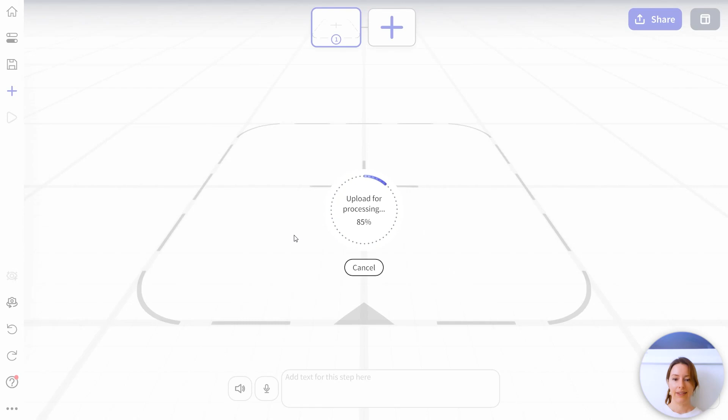Now we have two different options here. We can choose to bring in a 3D model from our CAD library, or we can load up our own 3D CAD files. You can see that's loaded into our scene.

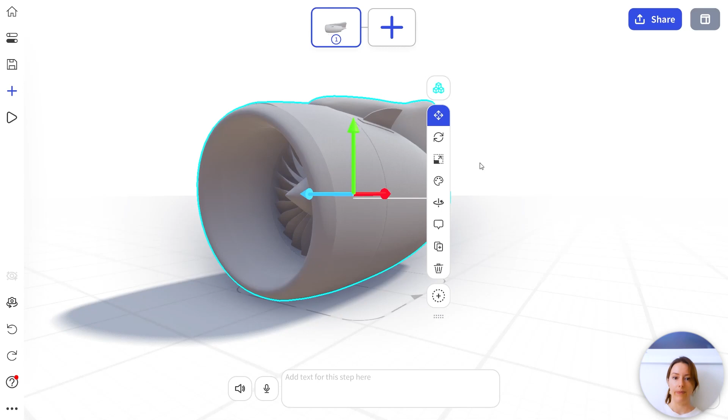Now we'll begin editing our model using the Jig toolbar. You can see that this contains a number of different tools that will allow us to edit our 3D model. We're going to start off with the Move tool. By dragging on these arrows, I'm able to move our model around our 3D scene. I can also open our Objects Properties panel in order to edit our position, rotation, and scale.

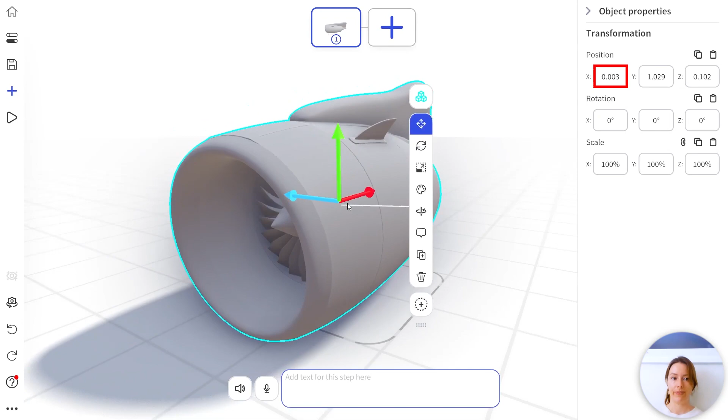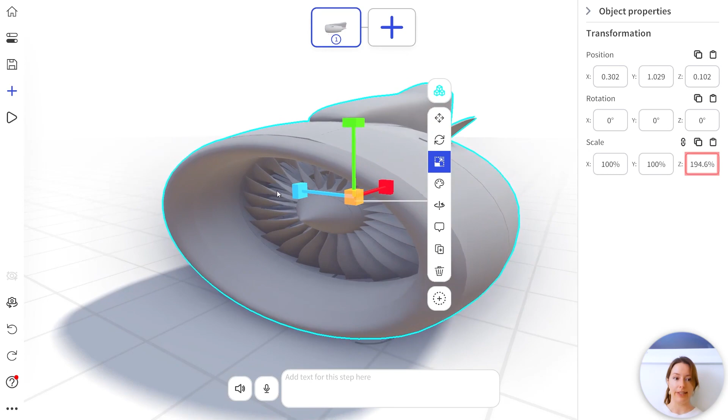Now if you watch the X-axis panel, you'll see that those position coordinates change as I move our object around our scene. I can also rotate my object and you'll notice those rotation values changing. I can also type in a custom value in our Z-axis box, and do the same with the scale. If I scale my object up, you'll see those values changing. I can also scale my object across the different axes. So the Object Properties panel is especially useful when doing precision movements, rotation and scale changes to your 3D model.

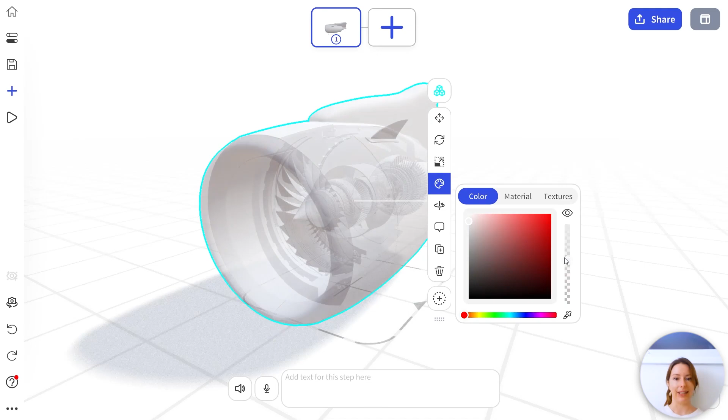You can see that I can edit our object's color. I can also apply some transparency or make it invisible using the Hide tool. We also have a number of different photorealistic materials to choose from. I'm just going to stick with the standard for now.

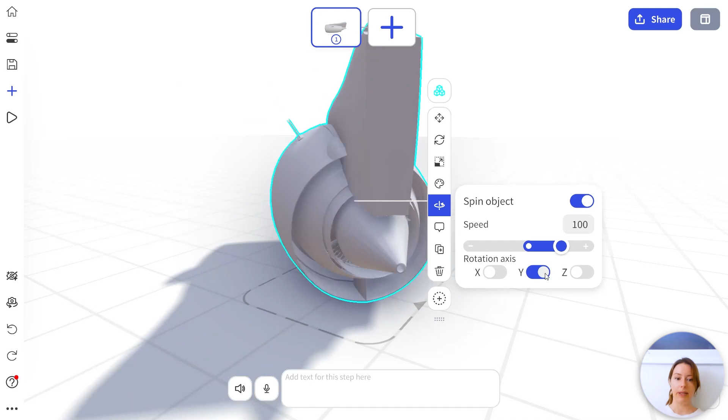Next, I'd like to show you the Spin tool. Once I turn this on, you'll see that our whole object is able to rotate. We're able to change the spin across different axes, but this tool is most powerful in sub-object mode. Here I can spin things like our turbine. I can also add in a custom value or drag this up to spin faster. And I can turn that spin off simply by turning off the toggle.

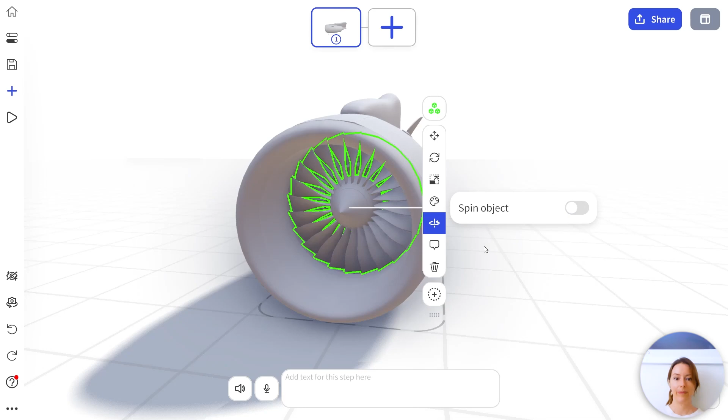Next, I'd like to add a label to our sub-object. In this case, I'll fill in turbine. Now if anyone clicks on this object, either in AR mode or in the web viewer, that label will automatically appear. I can also set this label to always visible. This means that the label will stay turned on and attached to our object at all times on this step.

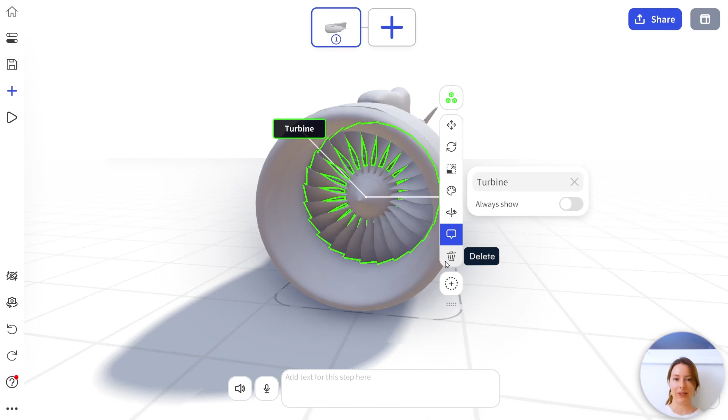Next, I'm going to show you the Delete tool. You can see that our turbine sub-object has now been deleted from our jig. And in order to bring that back, I just need to go to the Undo tool and our sub-object will automatically be loaded back into our scene.

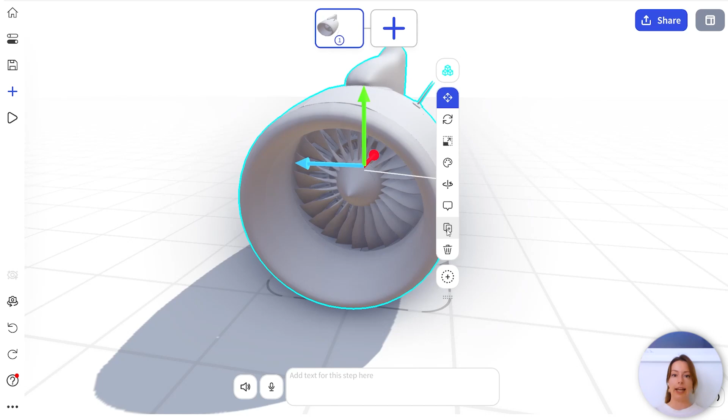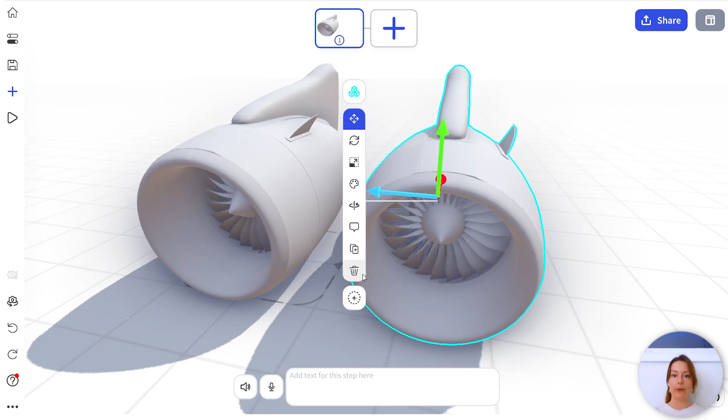Once you swap back into object mode, you'll also be able to access the Duplicate tool. This tool allows you to create an exact duplicate of the current object you have selected in your jig scene. This duplicate will also have the attributes that you've edited applied to it. So if you've changed or applied a material and color to your object, as well as given it some spin or labels, those will all be copied across to that new object as well. This can be a great way to quickly populate your scene with pre-edited objects.

One of the most powerful features of the Jig toolbar is our Replicate menu. In order to open that up, I'm going to press and hold on the Move tool. And now while we have this menu open, any of the attributes I select in our Jig toolbar, I'm able to copy across to different steps of our jig. So I can select as many of these as I'd like. I can click on them again to remove them from my selection.

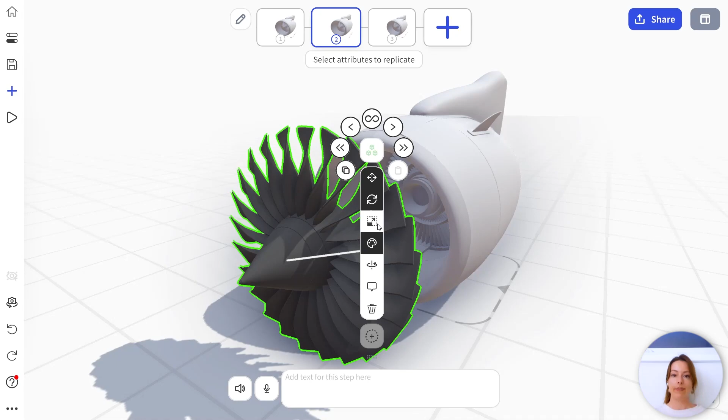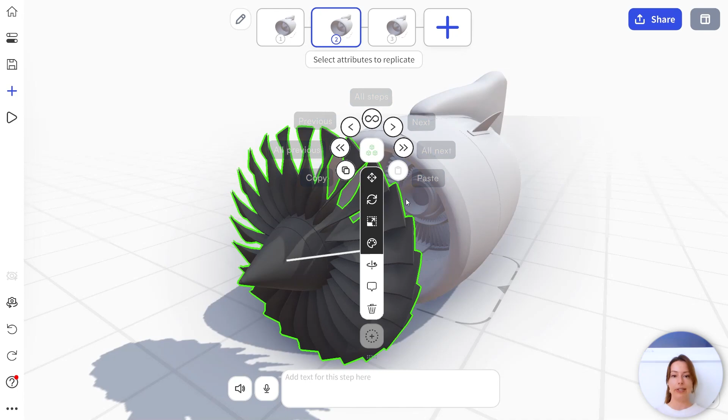I'm then able to use multiple different copying menus. I can copy back multiple steps, copy back one step. I can copy these attributes to all steps, or I can copy forward one step or forward multiple steps. We also have the option to copy and paste these attributes to a specific step in our jig, and those changes will be applied across the different steps of your jig.